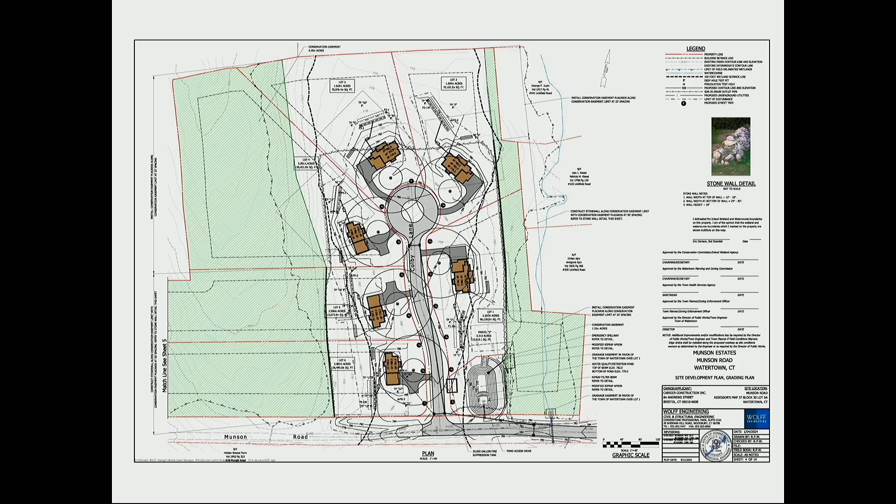The description of the stone wall looks good to me. Thank you for adding that. It's something that's recommended and we're trying to push for. Thanks for putting that in there, and it looks like it's in a good spot. Thank you.

No other questions? Make a motion to close the public hearing. I move that, but I want to mention one other thing, Mr. Chairman, regarding Waterbury. Yes, they have the right to protect their watershed, whatever. In case this commission makes any decision on it, that's between the property owner and Waterbury. It has nothing to do with us, because it is not under our jurisdiction.

Suppose the City of Waterbury sends something later saying they have no problem, that they have to deal with. But tonight we're only closing the public hearing, we're not approving it anyway, so there is time left there.

Anybody else in the public? No, I don't think so. Want to make a motion?

I move to close the public hearing for application 2024-1 of Carrier Construction Incorporated for a 6-lot re-subdivision, associated roadway construction, and construction of 6 new homes on Munson Road, Watertown, Connecticut. Second. Motion made and seconded. Any questions on the motion? All in favor? Aye. All opposed, any abstentions? Motion carries. Like to thank you for your cooperation.

Thank you. Just going through everything, thank you. Is it correct you're not going to vote tonight? Correct. Thank you. Thank you.

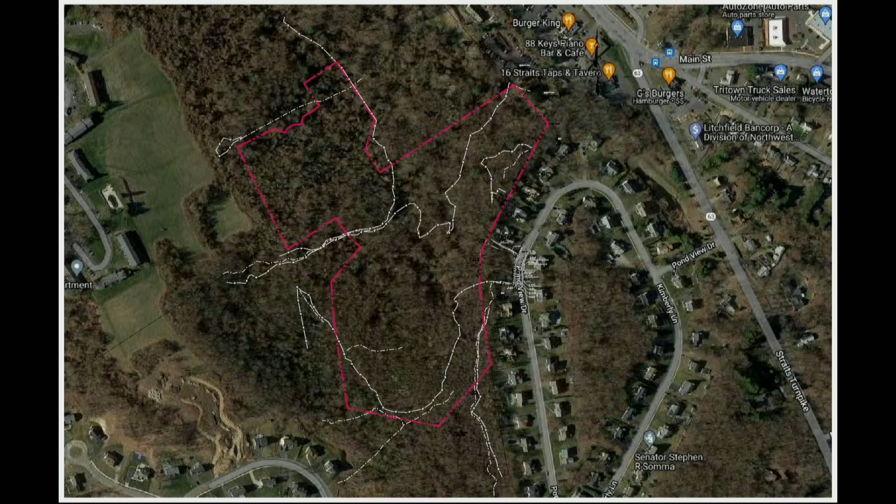On the next sheet shows that same area, but with the contours, so it's a little bit easier to see the different wetland areas. I'll go through the sub-watersheds, but essentially there's the wetland boundary to the south and west that has an intermittent water course—that area where some water flows out of the wetland system and meets the criteria as an intermittent water course before it's absorbed in the soil before connecting back.

There's a central wetland system with the intermittent water course where the proposed roadway would cross through the center of the project. And then on the north end, there's another intermittent water course. So basically 3 general areas that we'll go through in more detail.

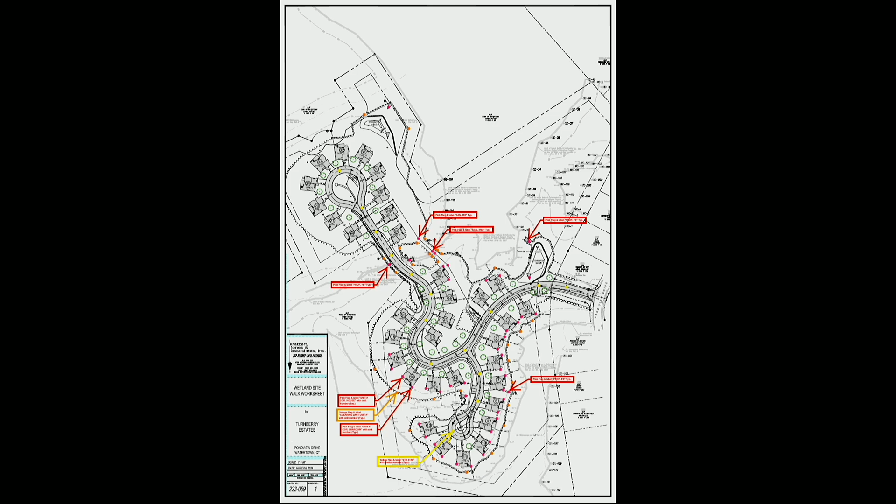So on the next sheet shows our proposed development, again on that overall location map, for orientation. This type of development is an age-restricted housing development, so it's not a subdivision. The land will remain as a common interest community owned by a homeowners association. All of this 24 and a half acres will remain under the same ownership as a homeowners association, with individual single-family homes part of that community. The age restriction is for all residents to be 55 and older, with a minor exception for a relative over 18 who can also reside. But for simplistic terms, it's a 55 and older community.

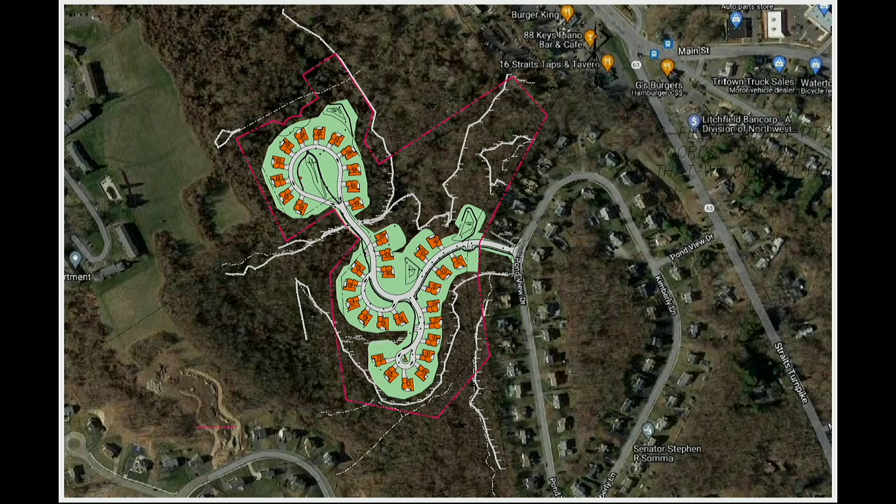I'll go through the housing styles a little later on, but this type of development is all private in terms of the roadway system - it's a private roadway system, not town-owned or maintained. The drainage system is also owned and maintained by the homeowners association. There'll be public sewer and public water serving the property as well.

The next sheet is the same, but blown up a little more so I can show you the features of the development. The entrance will be off of Pondview Drive, same as the subdivision. Upon entering the private road, there'll be a mailbox center with a kiosk for picking up mail delivery in a common location. This is the first stormwater basin, located just to the north of the main road. The private road continues, and we've made a rain garden - I'll get into more detail later - but it's much larger, in this location here.

The site has features in the turnaround areas with gazebos, common use areas, and landscaping. There's an internal sidewalk system connecting from the gazebo to the mailbox center and up to the far end with another gazebo and common area. The change we made was to enlarge this turnaround area to better accommodate the grades. By making this larger, we're able to get these units more along the existing grade on both the low side and the high side, so it doesn't change the wetland impact areas - it's just an effort to reduce some of the previous grading shown on the plans.

We still have the same stormwater basin in that area. And by enlarging this turnaround area, we're going to greatly enlarge the rain garden system. This is in response to comments we received from the town engineer and from the site walk that there's a definite priority with this plan to do everything possible to address stormwater management, which I'll go into in more detail. But this makes these rain gardens really function as an additional detention basin, so each area now will essentially have two detention basins.

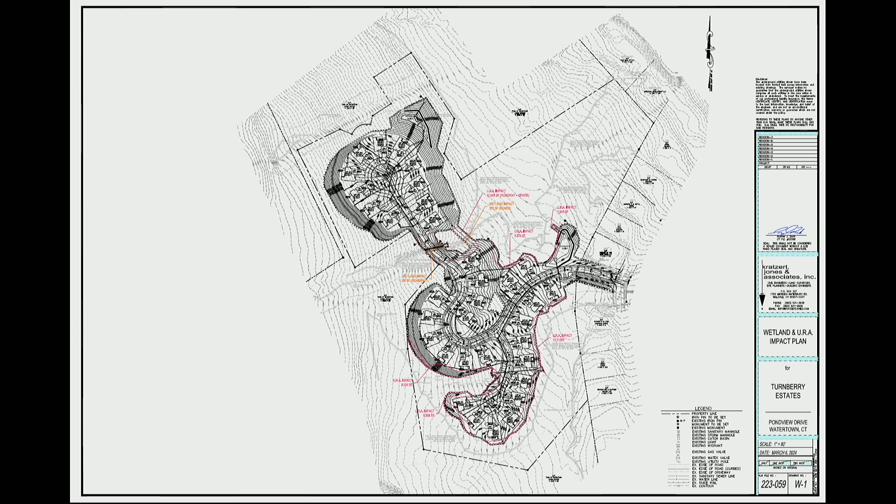With this development, we separated out the sewer crossing from the roadway. The previous design had the sewer crossing at the roadway within the same envelope, but much deeper and having more of an impact. The sewer crossing here is at a lower grade and only requires 375 square feet of impact, a small area. At a shallow crossing, it'll be restored and brought back to current function in terms of a water course and vegetation. By coming in at a lower grade, we're able to serve these homes without grinder pumps. The subdivision had those with grinder pumps, which have issues in terms of marketability, failures, or issues without gravity service. We're able to get gravity service by separating that out and also reducing the impact by having it as a shallow crossing.

Starting the comparison, this was the subdivision that was approved, I believe in 1995, Highview Estates. Some of the differences are with the town road standards, they had a wider road and a more broad curve that brought the road directly across that intermittent water course. This is that same roadway crossing, and they had a similar cul-de-sac in this area. The subdivision had proposed 20 lots.

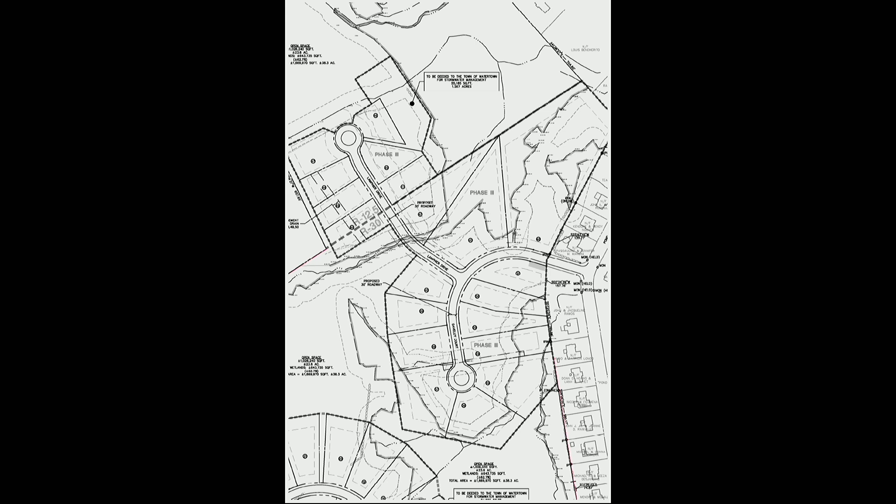The next sheet is the overall grading plan for that development. They had one stormwater basin up in this area. The rest of the water was addressed in terms of stormwater by connecting to Pond View and down to the stormwater basin at the entrance near Route 63. We have four basins, so we're trying to address it more on-site.

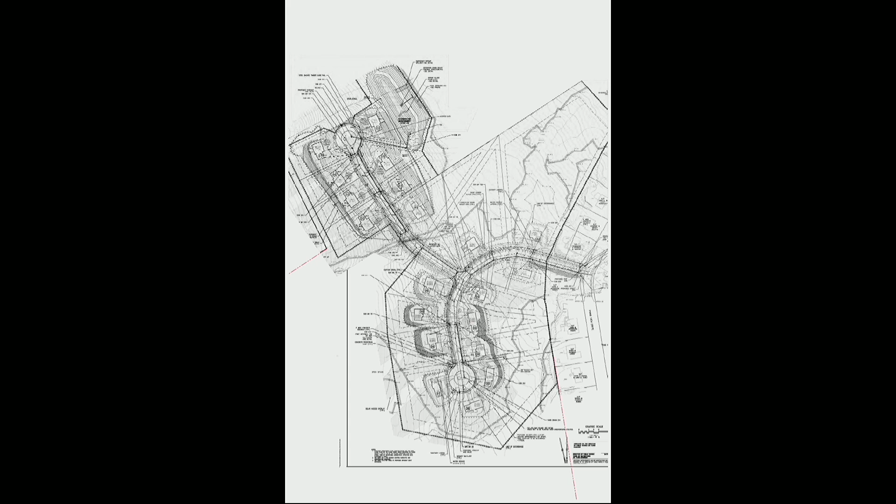For comparison, I tried to outline some of the key factors for comparing the different developments. The first part is the clearing and the impervious. This subdivision required 11.3 acres of clearing, shown in the outlined green area. With a conventional subdivision, you have larger setbacks, a 40-foot setback to the front of the home, and larger driveways, so there was more clearing required. Also, although not on the plans, there's always the potential for further encroachment because it's not controlled by a homeowners association, so potentially more clearing in the future. The impervious area of this development was approximately 3.7 acres, and again, this had a town road and town drainage.

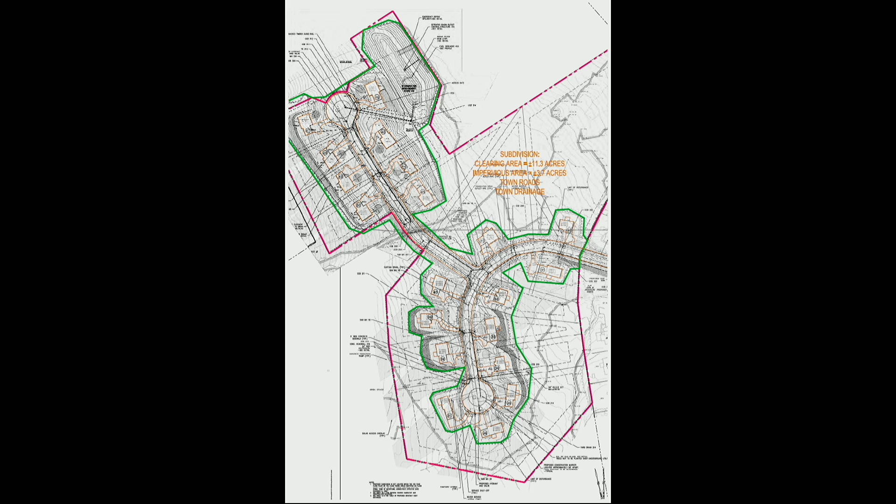On the next sheet, by comparison, we have reduced the clearing from 11.3 down to 10.5 acres, a reduction of 0.8 acres. The impervious area is about the same, 3.7 acres, reflecting 34 home sites compared to the 20, but about the same impervious area. So impervious stays about the same, the clearing is reduced, and again, this has private roads and private drainage.

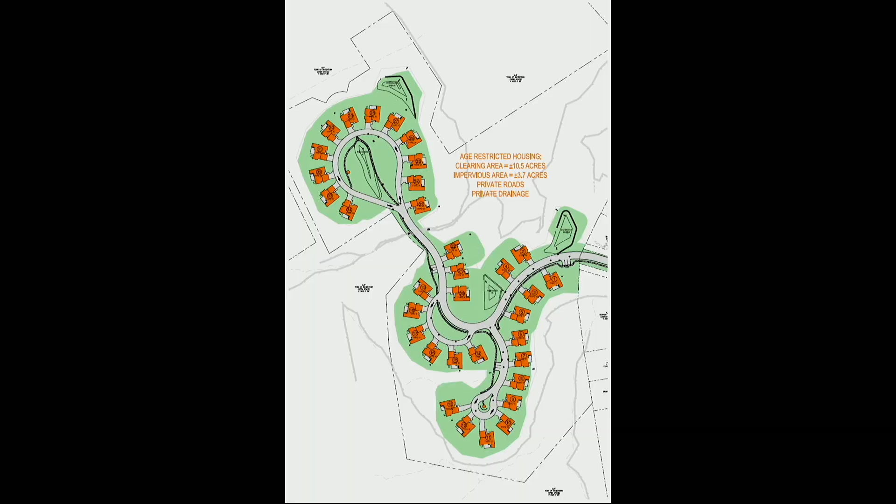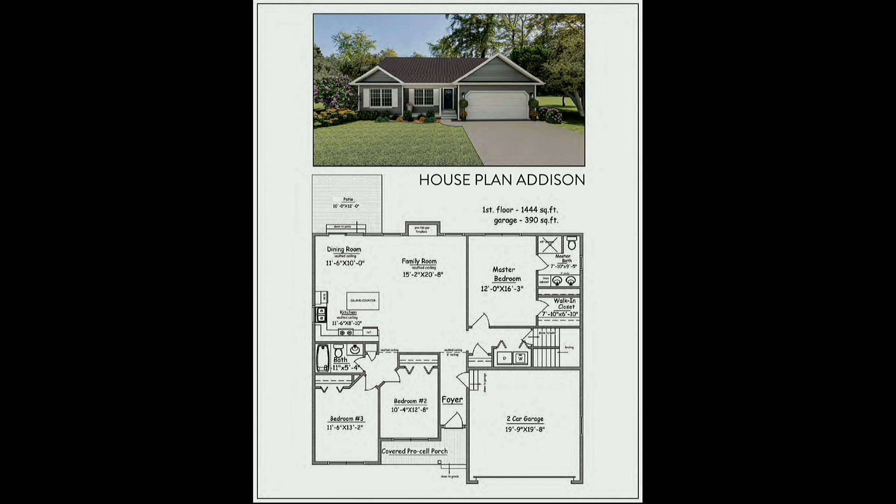The homes, again, are a single-family home style, although it's in a common interest community. All the units will have two-car garages, 3 bedrooms, with the third bedroom usually used more as an office. There's 3 different house plans in general. This is the first one, and we can scroll to the others, the second and the third.

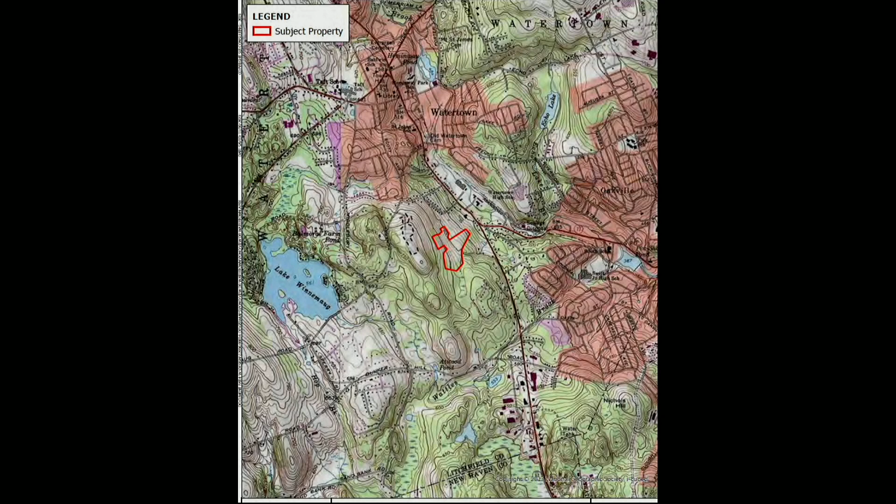The next sheet is from the DEP website. What I wanted to show here is how we're in line with how they delineate their watersheds. This is the boundary of the area that leads down to Steele Brook, which is down here, and the site is in this location.

This green line that I added to the plan shows our site being bisected here. The southern half of the site goes to Pondview Drive into that detention basin. The northern part of the site, from Highgate all the way down to Burger King, has no detention at all today — that water comes from the crest down to Route 63 without any detention. We'll be adding detention there to slow down those rates and hold back the water to prevent some of that downstream flooding.

The next sheet just shows that with the contours. Again, there's that divide line — the southern part of the site going to Pondview, the northern part going directly to Route 63.

The stormwater report that we prepared is going to be revised per the town engineer's comments, but I'll go through what we've developed and then some of the changes we'll be making. We developed the stormwater modeling for 4 different watersheds.

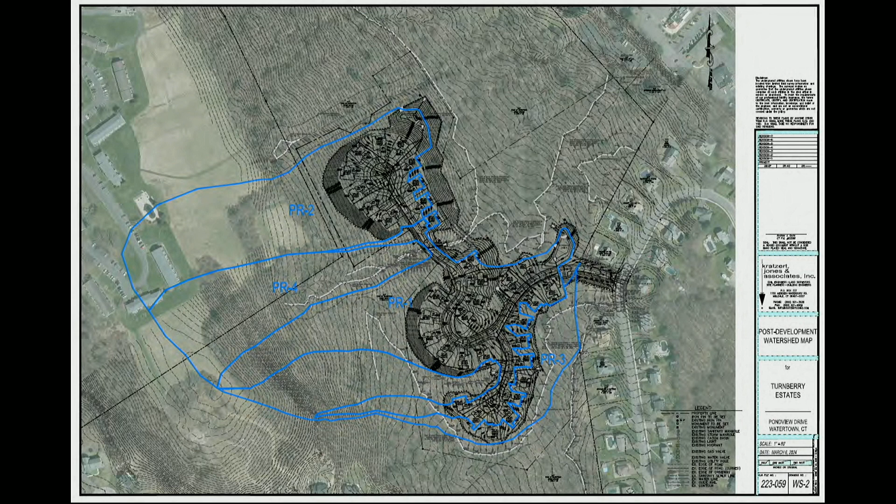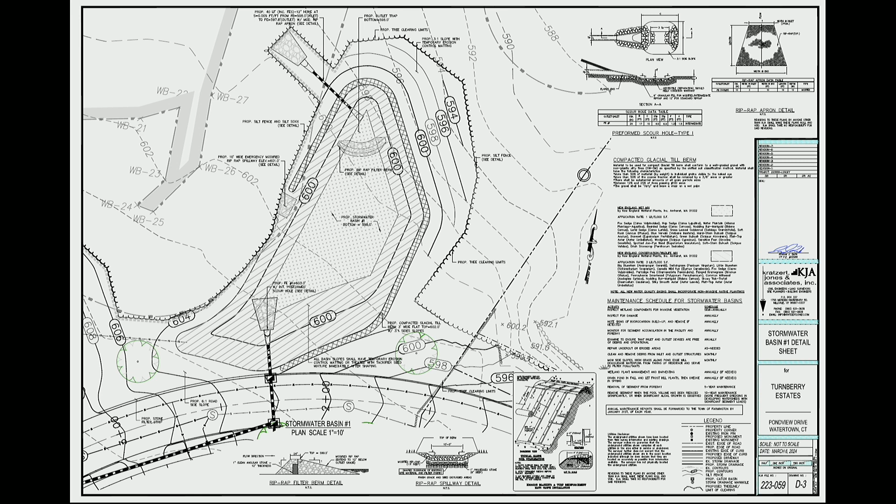Similarly, this is the north stormwater basin. We walked up to where the spillway is, the flared end, and the limit of clearing. This slope that'll be built to create this depression is a 3-to-1 slope. 2-to-1 is the max slope that is stable; we've gone to 3-to-1, which is more stable and can be maintained easier. With 3-to-1 slopes on a lot of projects, we haven't had issues with that type of slope. It can be built in steps and compacted.

The erosion control measures will be in place prior to construction, so I wouldn't expect any issues with this being developed, constructed, and stabilized, and this would be done before the stormwater system connects to it. This is very common on projects, and I wouldn't expect an issue with that. We are looking into whether this requires a DEP permit, because it still only retains a maximum of 3.5 feet of water. So I'm looking to get clarification as to whether a separate permit from DEP is required. We'll find that out.

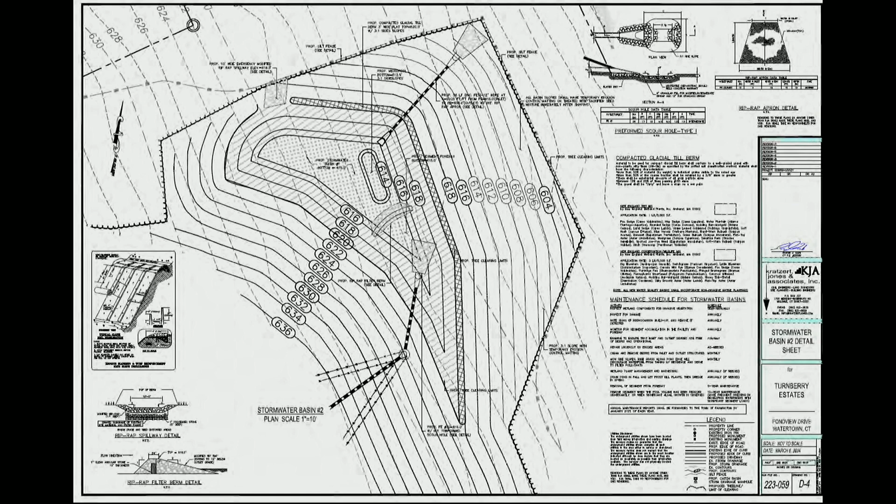The rain gardens are going to be much smaller, as was shown on the plan, but those have the additional feature of the soil mixture for biological treatment and the plantings that provide that water quality treatment.

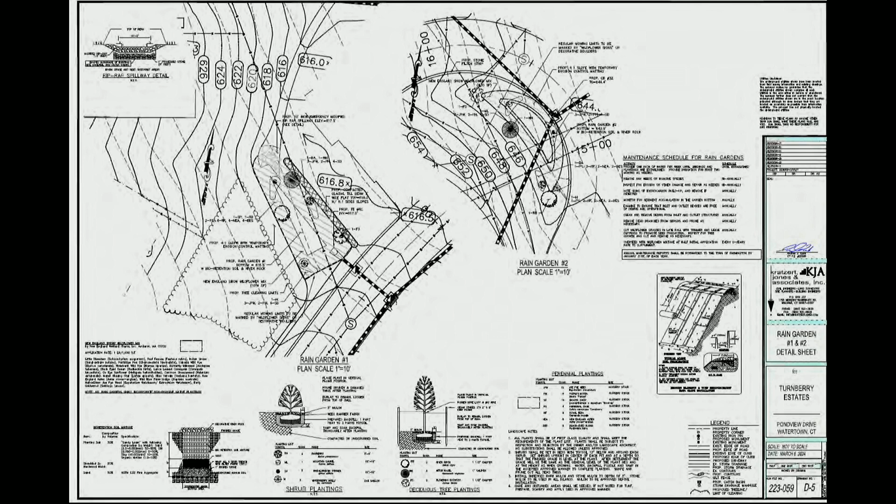This again is the comparison. We did the comparison of the impervious areas, but now I want to go back to the comparison of the wetland impacts as a summary. Our development has, between the small area, the 375 square feet for the sewer crossing, and the roadway crossing, a total wetland impact of 1,662 square feet. And then an upland review area impact, I use the 50 feet for comparison to the subdivision. I know that's not the current standard, but just to have apples to apples with the subdivision numbers.

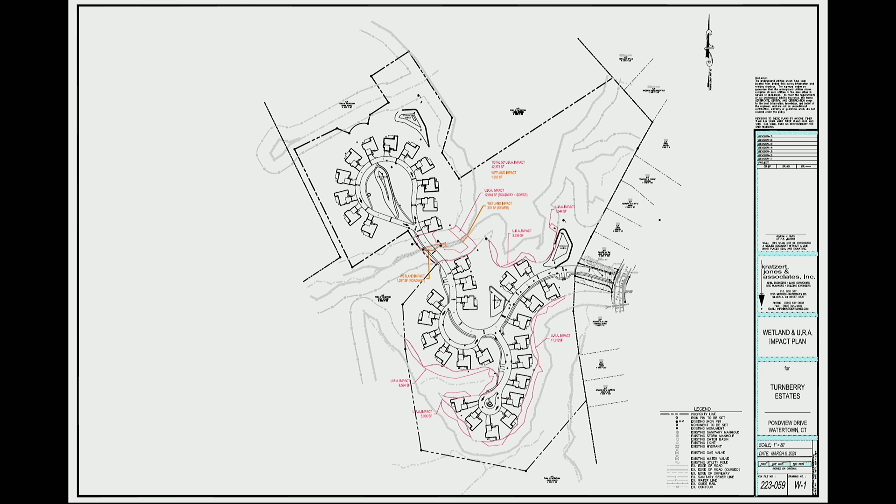The 50-foot impact area on this development was 42,372 square feet, approximately 1 acre. By comparison, on the subdivision plan, direct wetland impact went from 2,077 square feet to 1,662 square feet, so we've reduced the direct wetland impact by about 400 square feet.

Also, the subdivision had 125 feet of linear impact to the watercourse on the south, and 150 feet of linear impact to the watercourse on the north. We've avoided both of those. The upland review area impact, shown in red here, was about 1.5 acres, 63,000 square feet, and we reduced that to 1 acre. So in addition to reducing the clearing, we've reduced the direct wetland impact and the review area impact.

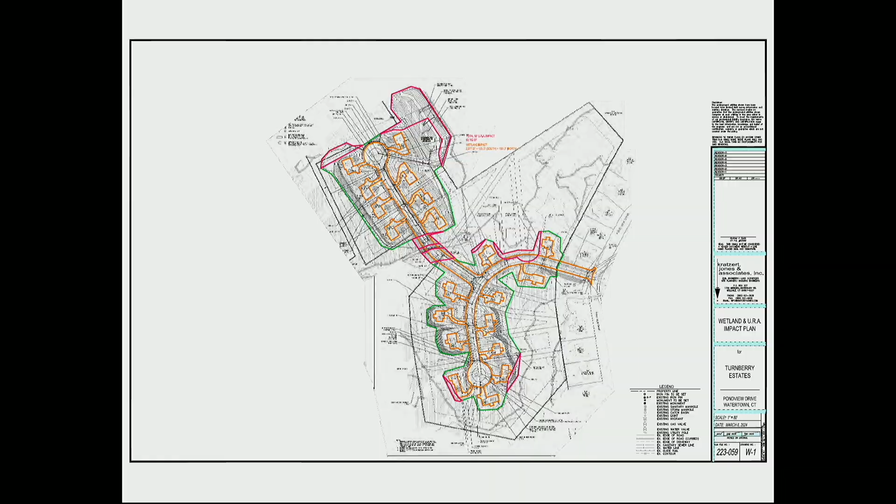We wanted to address the comments from the site walk and from the town engineer, and work on those revisions. So the revisions in progress address the town engineer's comments by updating the model to reflect the TR-55 model for the soil conditions, and that will be completed.

From the site walk, it was clearly evident that we want to do everything to address stormwater management. As you see on the plans before you, we've doubled the stormwater management areas. That will demonstrate that we are retaining and detaining as much on site as possible to prevent any downstream impacts, so that when these revisions are complete, this project will not only address the town standards on site, but provide a needed beneficial impact downstream to reduce peak flows off-site.

At this point, to continue our presentation, I'll ask Matt Sanford to go through our wetland delineation.

Good evening, for the record, Matthew Sanford with SLR. I'm a professional wetland scientist and registered soil scientist. I think the first thing we'll do is go back to existing conditions related to this project. Back in November of 2023, we were retained to go out to this site and delineate the wetlands and watercourses on this particular site.

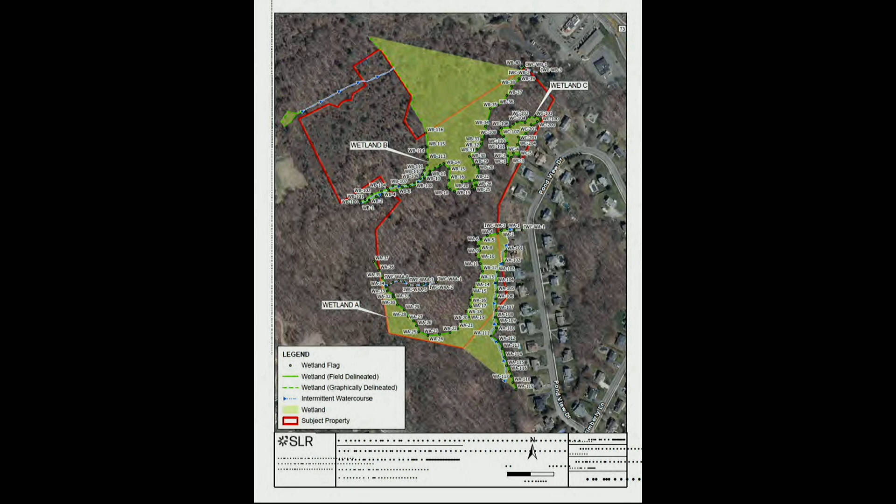Before we do that, as soil scientists, we take a step back and look at the types of soils anticipated on the site through the NRCS Web Soil Survey. There are specific soil types indicative of Watertown and of these sites, including dense till soils, known as the Paxton Montauk series, a well-drained soil; the Woodbridge series, a moderately well-drained soil; and the Ridgebury-Leicester-Whitman series. Within Ridgebury, you can have two drainage classes, somewhat poorly drained and poorly drained, and as you move into the Leicester-Whitman part of the series, those become the very poorly drained soils. So we have a combination of all five of these soils on this site.

Our delineation is based on soils in the state of Connecticut, looking at drainage class associated with that. There were three primary wetland systems delineated on the site, belonging primarily to the class of Ridgebury soils, with the exception of the area in Wetland B, located here in green, where you start to get some very poorly drained Leicester soils. There were three wetland systems delineated on site.

The first one, located along the southern part of the property, is called Wetland Series A. That wetland is a hillside slope wetland, also called a palustrine forested wetland, more commonly a red maple swamp, as you may have heard earlier in a different presentation. It has an intermittent watercourse that runs along the eastern edge of that wetland and eventually makes its way down under Pondview Drive, through the forested area on the opposite side of those houses, and eventually probably into the stormwater basin.